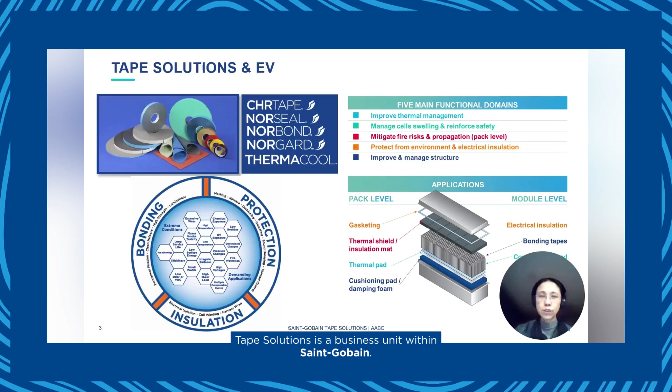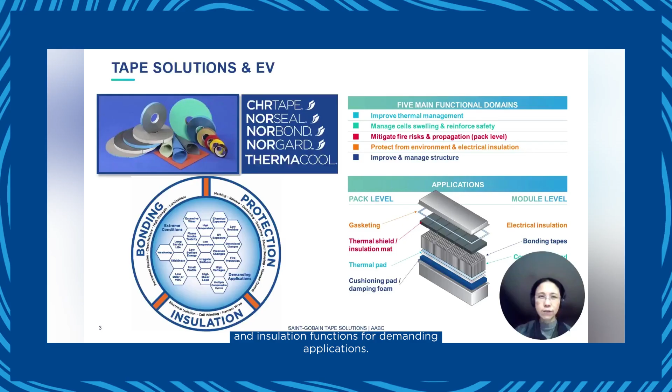Tape Solutions is a business unit within Saint-Gobain. Its specialty tapes and foams provide bonding, protection and insulation functions for demanding applications. Over the years, we developed multiple materials for battery pack applications, including at cell level mechanical cushioning and thermal runaway protection, and also at module and pack level thermal interface material, gasket, and mechanical holding pad.

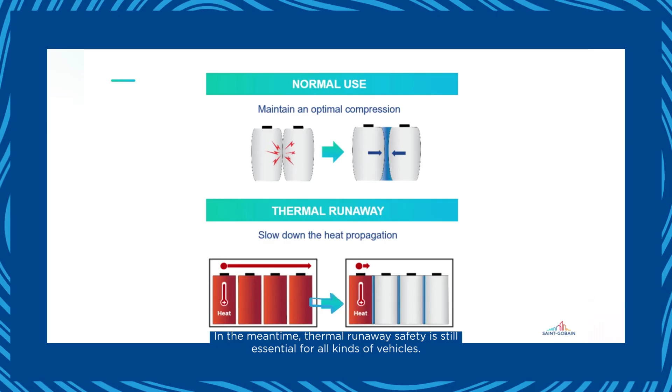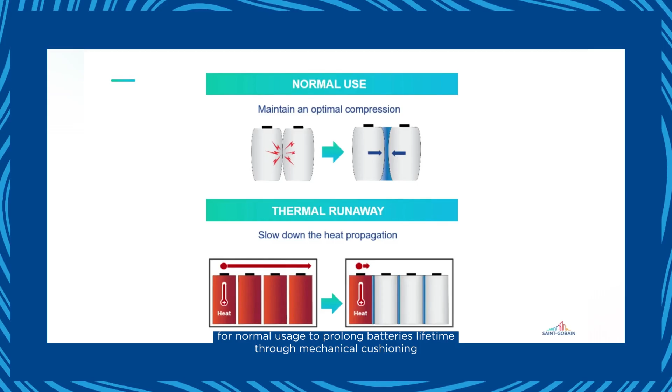Heavy-duty vehicles need very robust battery packs. These types of vehicles have very heavy battery usage because they have long annual mileage. The batteries are most of the time in use. Hence, the durability of this type of battery is very important. In the meantime, thermal runaway safety is still essential for all kinds of vehicles. In this presentation, we are going to share with you our recent development for normal usage to prolong battery's lifetime through mechanical cushioning, and also the progress for thermal runaway protection.

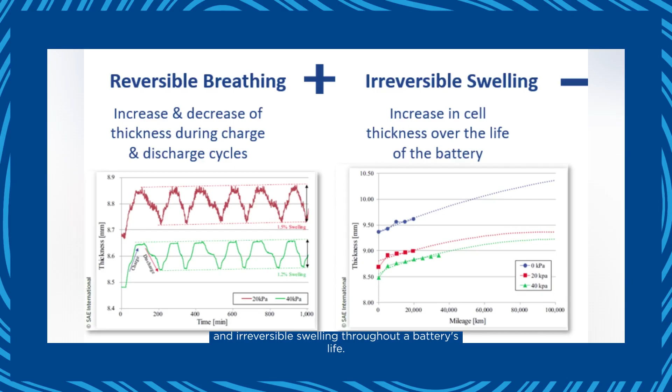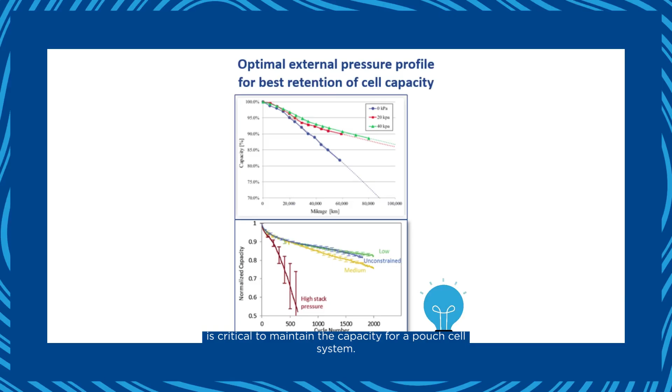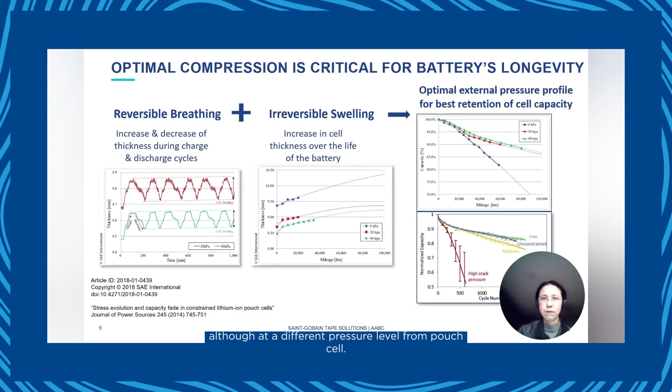Optimal compression level is critical for battery's longevity. During the charge-discharge cycle, a battery is changing its dimension, including reversible breathing during each charge-discharge cycle and irreversible swelling throughout a battery's life. Research has shown that the proper, not too high, not too low level of pressure is critical to maintain the capacity for a pouch cell system. And our recent study has proven that this rule applies to prismatic cell systems, although at a different pressure level from pouch cells. In fact, different batteries need different mechanical management solutions.

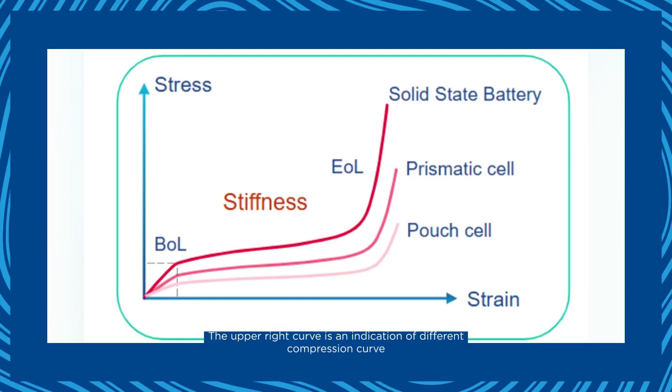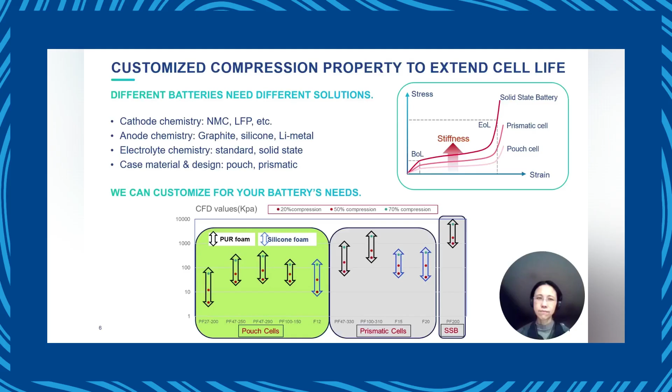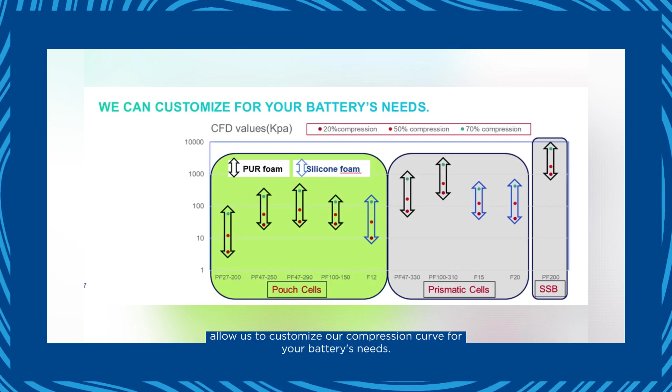The deciding factors include cathode, anode, electrolyte chemistry, as well as case material and design. The upper right curve is an indication of the different compression curves requested by pouch, prismatic, and solid-state batteries. Our polyurethane and silicone technology allow us to customize our compression curve for your battery's needs. In addition to tunability, we emphasize the durability of our product as well as the capability to support our customers' design process. I'm going to use 2 case studies to illustrate.

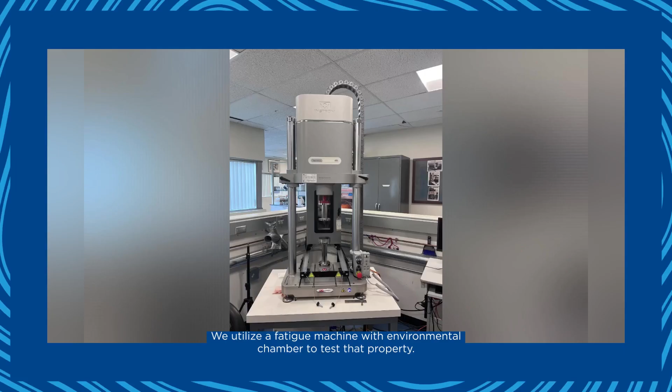My first case study is to evaluate the durability of cell-to-cell compression foams. We utilize a fatigue machine with an environmental chamber to test that property. Subjecting the material to room temperature, 60 C and -20 C, we are mimicking the material's behavior in normal climate, very hot climate, and very cold climates. And we are subjecting the material to 3,000 cycles, representing a battery pack's typical duration.

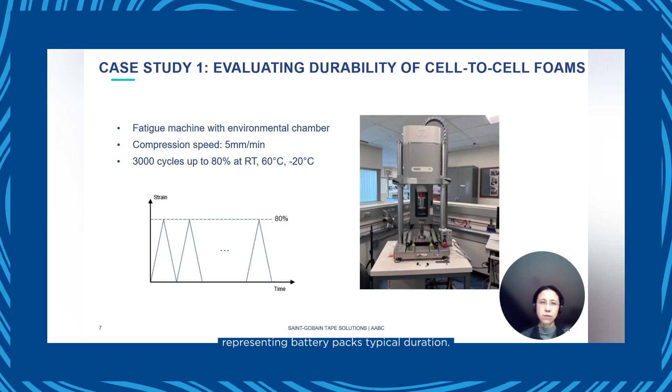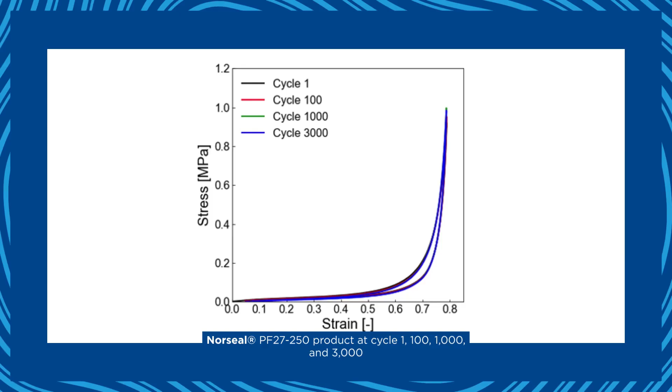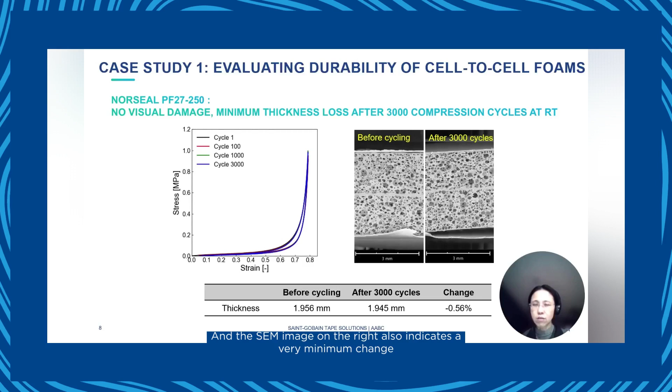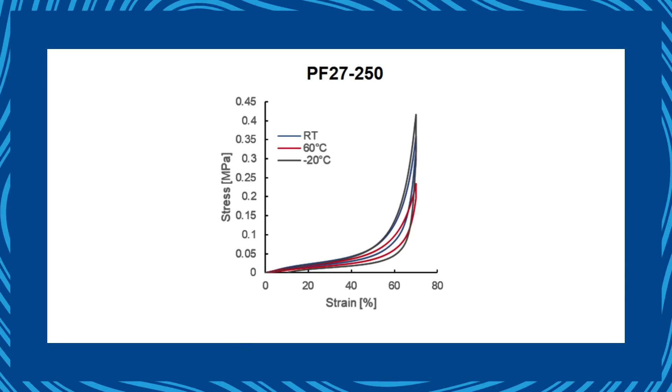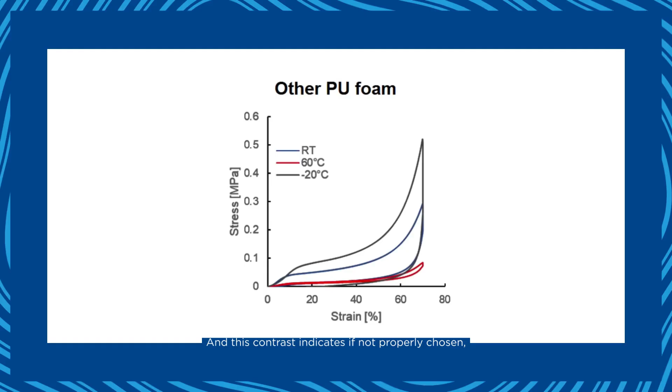In contrast, other PU foam could soften significantly at 60 C hot climates, or could stiffen significantly at a minus 20 C cold climate. And this contrast indicates that if not properly chosen, the compression foam could provide the battery pack quite different mechanical cushioning under different temperatures, hence influencing the battery's life.

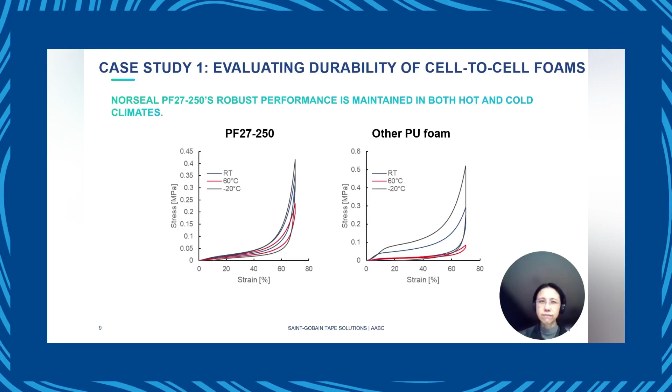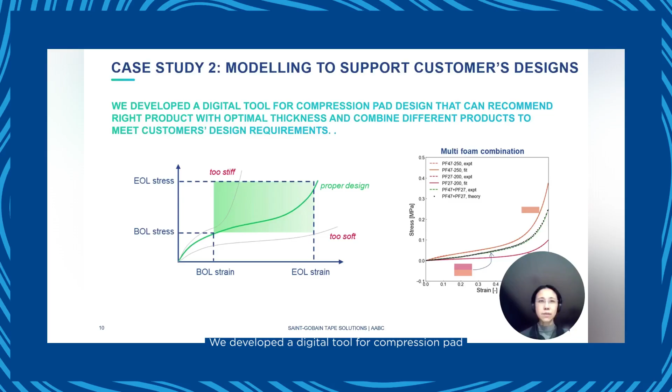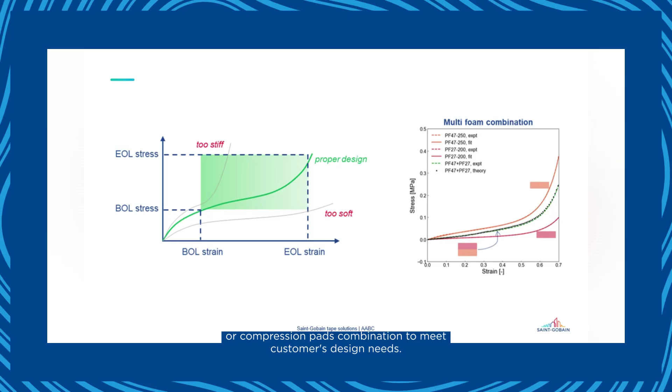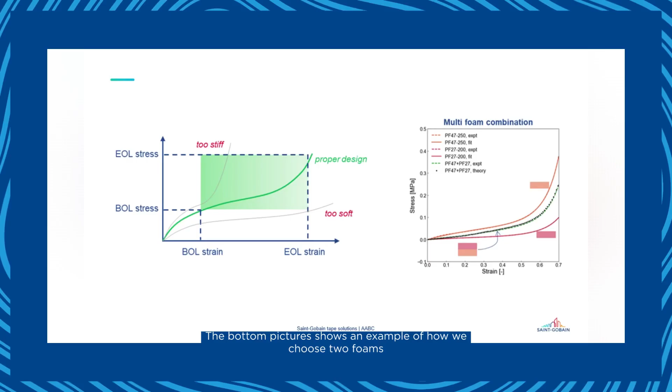Our second case study illustrates how we use modeling to support customers' designs. We developed a digital tool for compression pads that can select the proper compression pad or compression pad combination to meet customers' design needs. The bottom picture shows an example of how we chose two foams to meet a special requirement from a customer's battery.

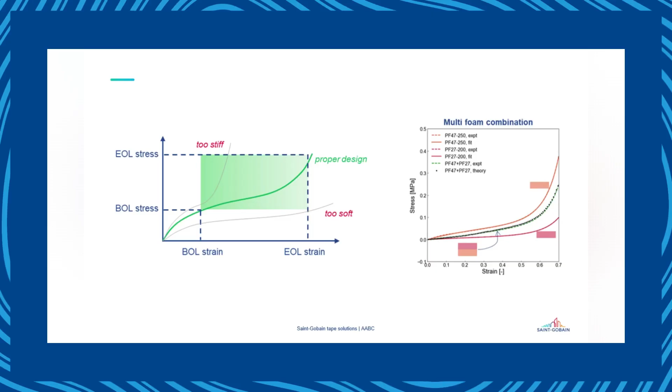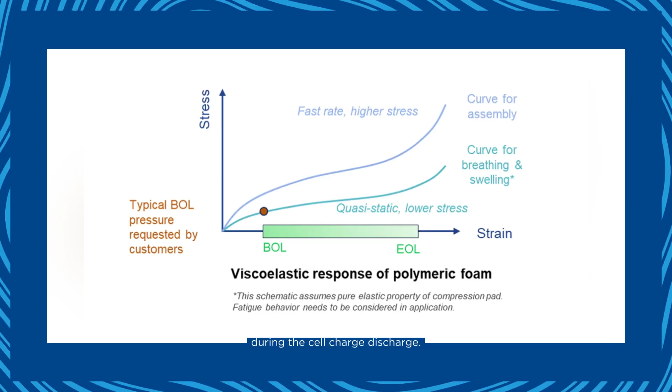In addition to material selection, we also consider our products' different properties in different usage stages. For example, because of its viscoelastic properties, foam typically exhibits different mechanical properties during the fast assembly process as compared with the slower breathing and swelling process during the cell charge-discharge. And our tool can quantify this phenomenon for our customers.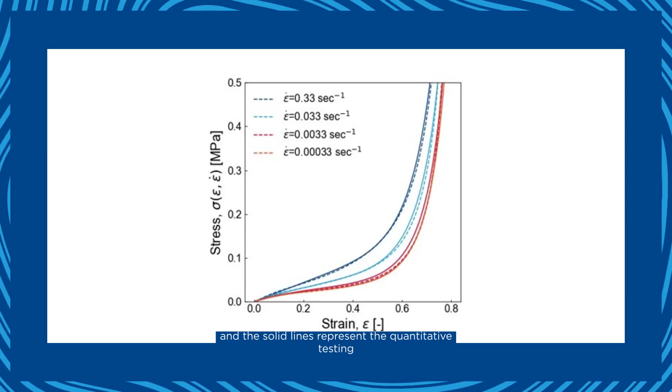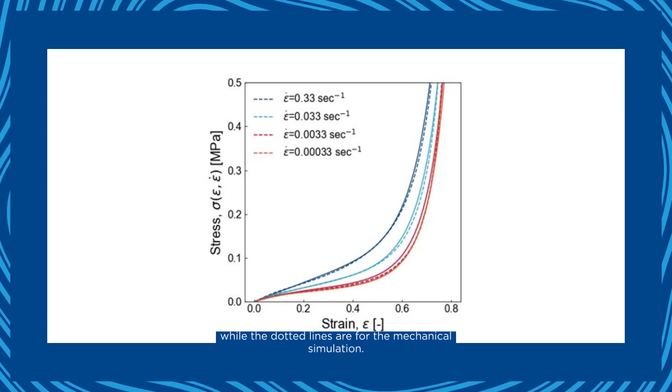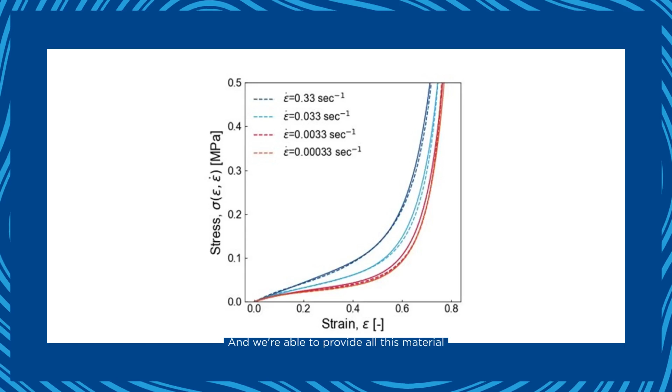An example is on the right figure: the solid lines represent the quantitative testing in the Instron machine, while the dotted lines are for the mechanical simulation. And you can see they overlap with each other pretty well. And we're able to provide all this material to support our customers' design process and make sure that it's realistic in their actual assembly and testing process.

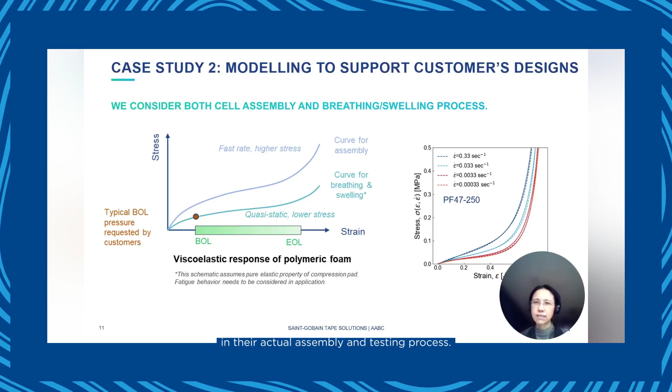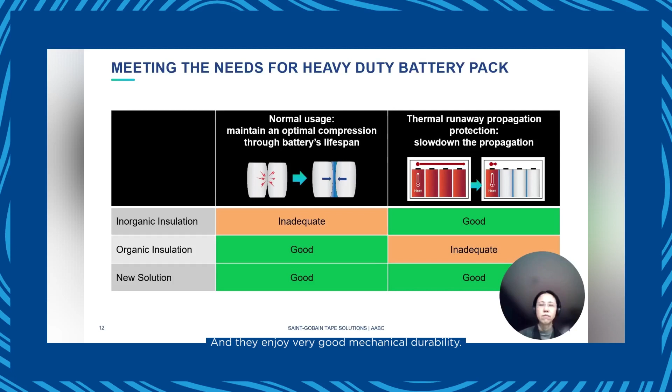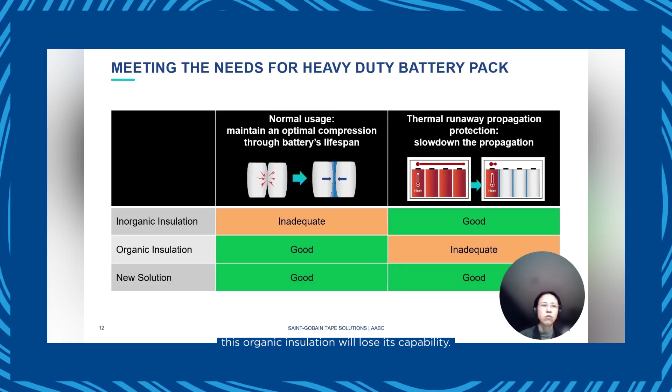Regarding thermal runaway propagation protection, two product families are popular in today's design space. One is inorganic insulation, such as aerogel or inorganic fiber mat. They typically have very good thermal insulation. However, because of their intrinsic mechanical property, the durability through thousands of cycles is typically inadequate. The second material family is organic insulation, such as silicone or polyurethane foams. They enjoy very good mechanical durability. However, because of natural degradation at thermal runaway temperature, this organic insulation will lose its capability.

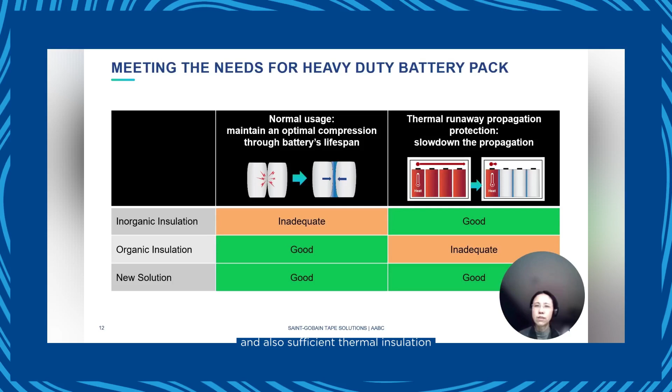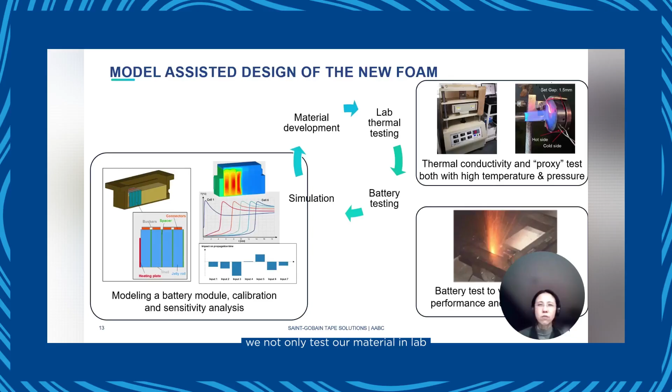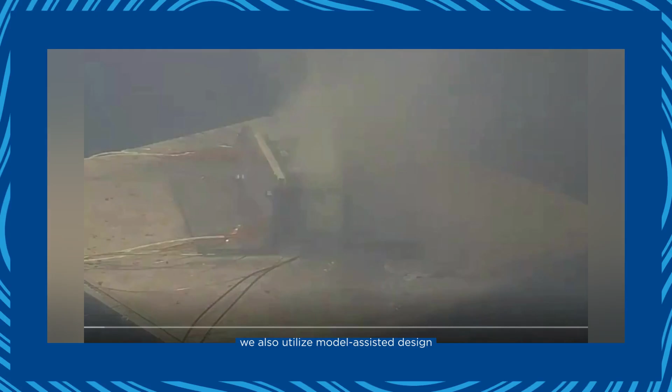Today we are proposing a new solution with good normal usage mechanical cushioning over thousands of cycles, and also sufficient thermal insulation at thermal runaway temperature. To ensure the robustness of our design, we not only test our material in lab at high temperature, high compression, and real battery testing, we also utilize model-assisted design to simulate this thermal runaway process.

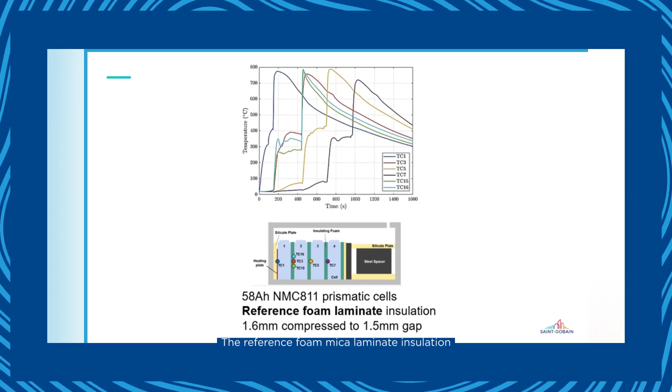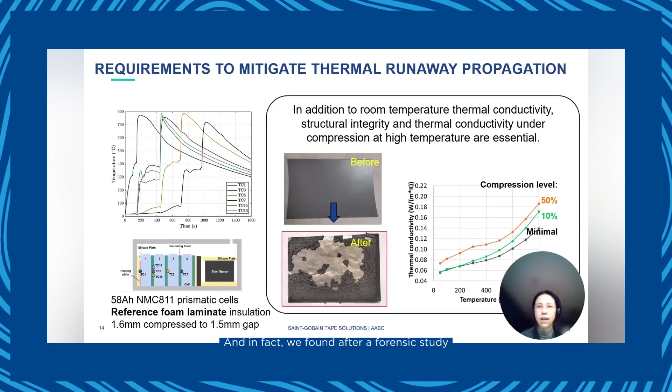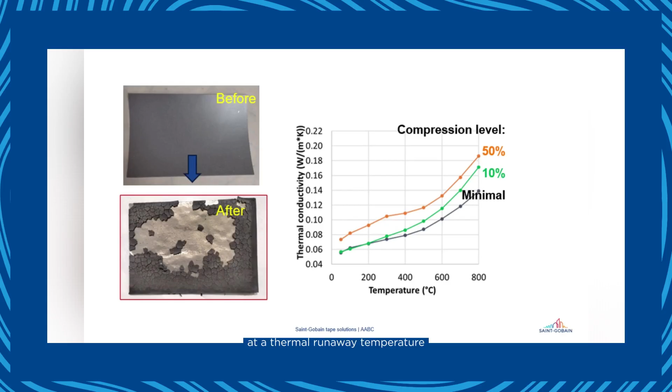The pictures on the left-hand side of this slide indicate a typical short stack testing of prismatic NMC 811 cells. The reference foam mica laminate insulation was not able to stop the propagation. In fact, we found after a forensic study that not only the thermal conductivity at room temperature is important, but also the thermal conductivity at thermal runaway temperature, as well as the integrity of the foam at thermal runaway temperature, are critical for this protection.

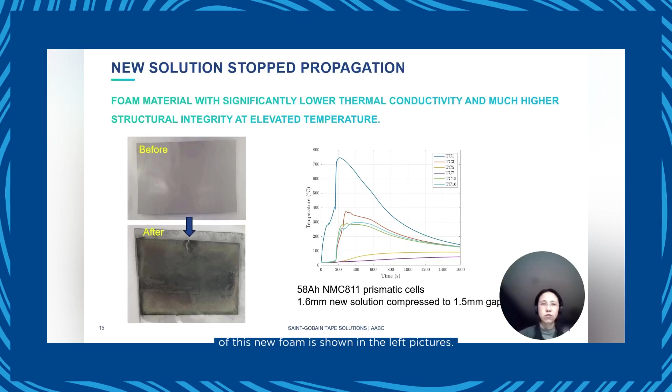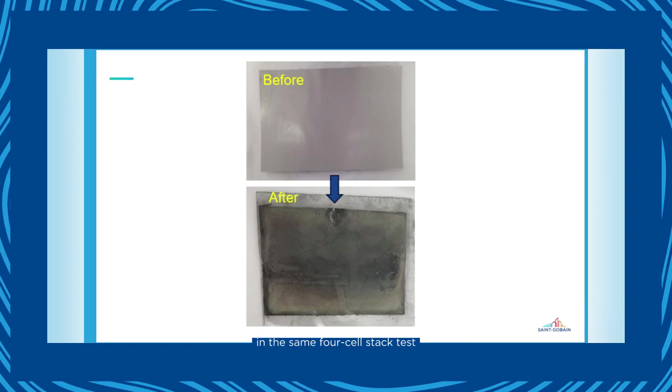We developed a new foam material with significantly lower thermal conductivity and a much higher structural integrity at thermal runaway temperature. The before and after thermal runaway pictures of this new foam are shown on the left. As expected, this new foam stopped the propagation between cell 1 and cell 2 in the same 4-cell stack test as shown in the previous slide.

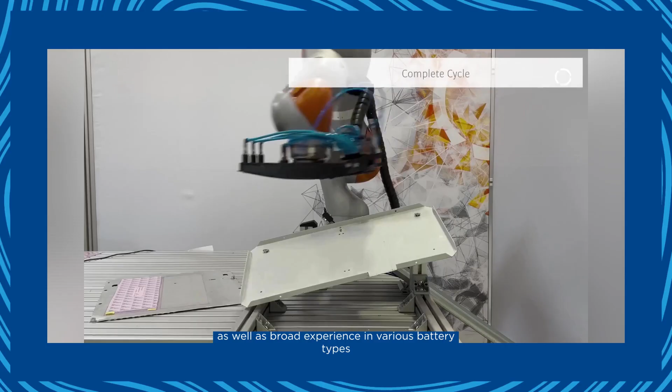In conclusion, we support our customers' success with a wide range of robust and durable solutions, with our comprehensive testing, simulation, and real-life validation capabilities, as well as broad experience in various battery types and industrial automation processes. We are honored to be selected by the ARPA-E Circular Program to continue our journey to extend the battery's lifetime and ensure safety with our packaging materials.